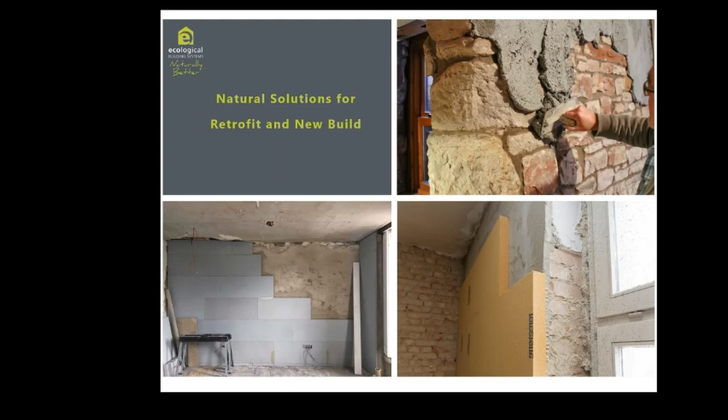What you can see is we've been supplying a range of solutions in ecological building systems for a long time. We've partnered with many of Europe's biggest manufacturers and suppliers of low energy products and low carbon solutions. For example, a lot that will feature today would be like Diathonite, thermal plasters, or Calsitherm that some people might be familiar with, to less familiar applications like natural paints and things like that.

For years and years we've been supplying these products to the market, but only more recently has there been a wider agreement that this is the type of thing that's needed. These types of solutions we've been supplying are now generally recognized as the right way to treat older buildings. So this document is hot off the press.

It's the latest government guidance for specifiers and installers, and it's now basically going to form part of the rulebook approach for improving energy efficiency in traditional buildings. It was published in 2024, or the last quarter of 2023.

One of the key points it raises, I took a quote directly from it: any measures that would present unacceptable hygrothermal risk should be excluded from the short list of measures. Now that's a warning to designers not to propose non-breathable applications in these types of buildings if they're likely to cause some form of decay or future detriment to the building.

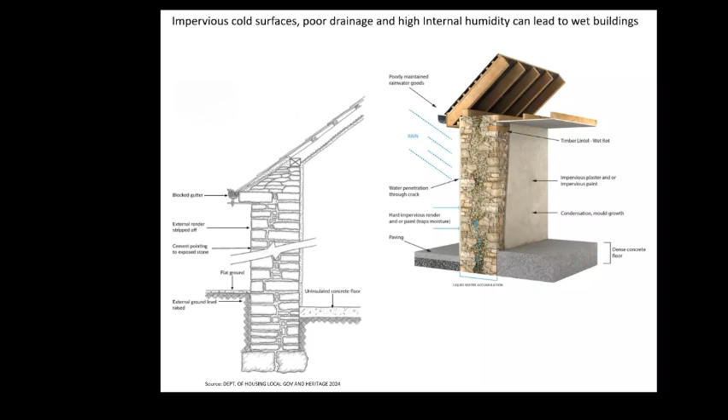It shouldn't just be 'put this up, it's grand, this is what we've done for years,' because what we've done for years has led to these types of problems.

What about the ground moisture? What about building decay and things that fall into disrepair over the years? There's a lot more factors at play than just internal moisture, so the dry line is a very highly risky approach.

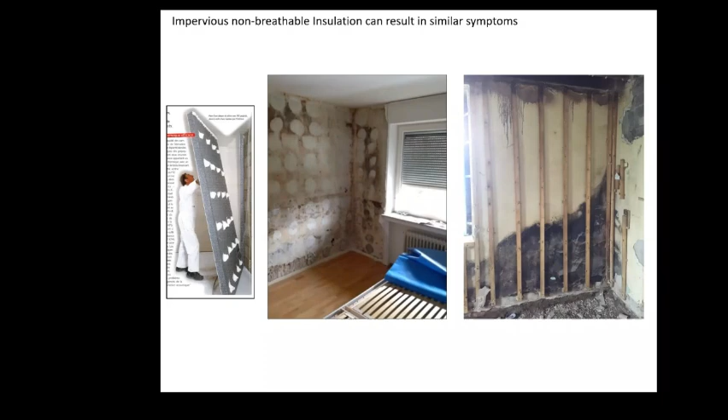And then you get this attitude whereby, oh, we can just keep it off the wall. If you keep it off the wall, you create a big space, like the spaces between the adhesive. A big unventilated space can be a stagnant air pocket full of moisture. As warm air leaks into that space, it gets more dense, and as it gets more dense, the humidity of the air rises until it falls out of the air, creating water pockets behind the insulation.

So the only way to do a system like that is to fully ventilate it to the outside, which would mean perforating an old building in multiple places, top and bottom, in rows and sequences of holes. So you can do a lot of damage to a building to ventilate a dry line like that. It's not appropriate, and probably not advisable to go down that road.

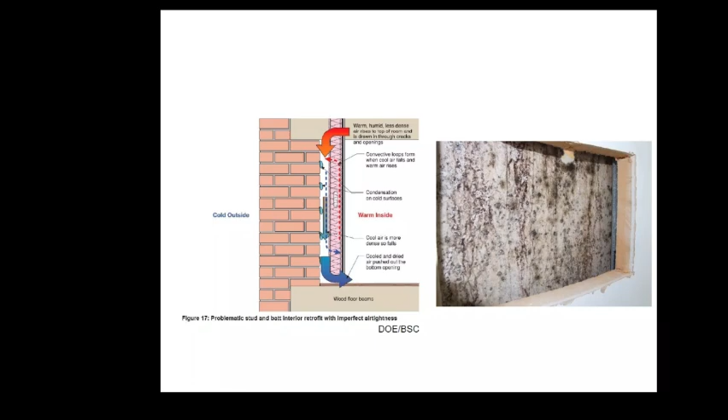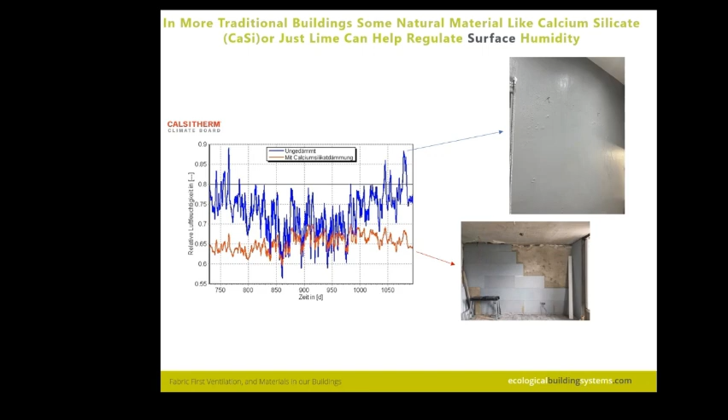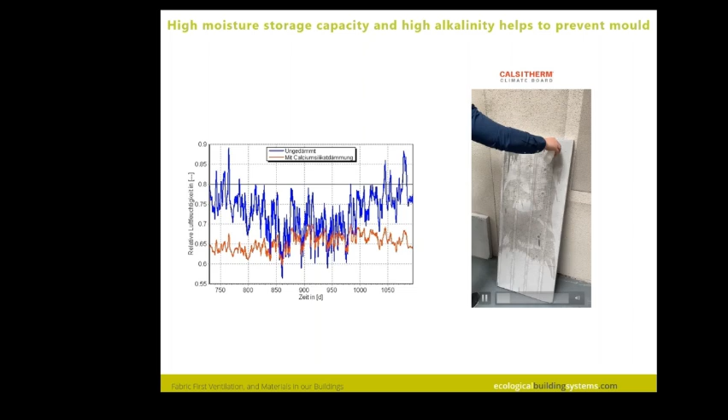Even if condensation was going to occur on a board like this, it wouldn't really matter, because lime, particularly lime or lime-based products, have a very good ability to prevent or buffer the influences of moisture over time. This image shows me actually pouring water onto a board that's made with lime.

You can see by how capillary active it is, how unlikely condensation is to occur on that board. The second a droplet of water tries to form, the lime-based product wicks that moisture into the storage capacity of the material, where it's held until vapor pressure dictates which direction it dries, usually back to the inside when temperature and ventilation is good. So boards like this can have a very high offsetting effect on the risks of condensation and mold.

In fact, they tried to make mold grow on this board in a lab in Germany for 90 days, and they couldn't get it to work, not even in a lab context, because lime also has a high alkalinity. High alkalinity is naturally antiseptic, so it's quite a good biocide. Lime-based products typically do this: lime paints, lime plasters, lime-based boards, things like that. This is why when people talk about old buildings and mention lime, most people think that sounds right for an old building—but these are the reasons why.

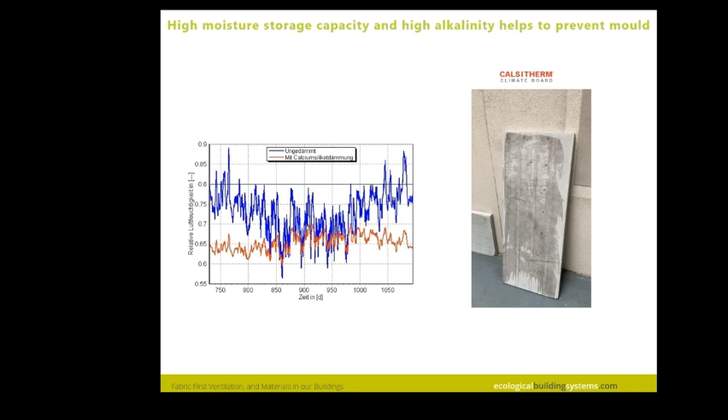That's often the reason why, back in the good old days, these solutions were very consistent with the behavior of traditional buildings and how they managed water in an ongoing fashion through the building life cycle. Back on the first image I showed you, a building covered in cement, the wall was clearly getting really wet. Well, this is why in the olden days they used to cover buildings in lime, with good drainage on the outside, well-maintained rainwater goods, good gravel floors, limecretes, and stuff like that.

Those walls were dealing with the same amount of water—the exact same amount hitting them daily, and the same wet lives where people were boiling pots, probably even wetter lives back then. But the walls were really capable of absorbing and desorbing moisture, managing it in an ongoing way. The moisture balance was right, and there was no water being trapped where it could accumulate—where, in essence, the cup could fill up.

In this case, the cup stayed empty. It was getting wet, but it was always drying. So this is what we're looking to achieve with insulation systems suitable for use in traditional buildings.

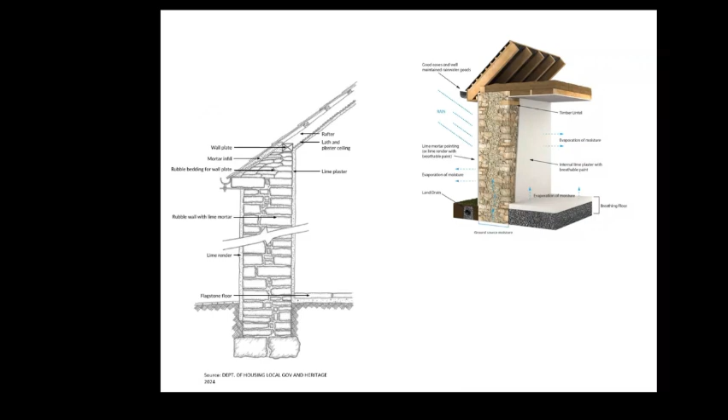So I've been monitoring with an air quality monitor, which I'll get onto later today, and the air quality was horrendous in the building. I've had all sorts of problems that have built up over years of mistreatment. So I finally bit the bullet and said, okay, I keep telling people about lime-based products—I'm going to do it myself, and actually look at the air quality and see how it's affected it.

So what I can say is it's been highly successful and no mold has returned. That's largely due to having warmer surface temperatures, but also a better ventilation system active within the building.

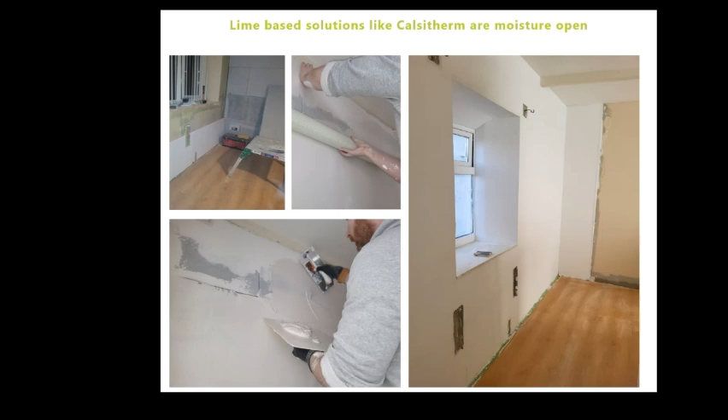Some lime-based solutions can come in other forms—they're not all board-based. Take this building, for example. How could you insulate this building with a board, either from the outside or the inside? But what you're looking at there is an insulated building, using a lime-based insulating plaster called Diathonite. Diathonite, which some of you may be familiar with, contains cork, clay, and diatomaceous earth, with equal parts hydrated and hydraulic lime.

Everything in it is completely natural, but it insulates about 25 times better than standard lime. And of course, it's CE marked, it has DOPs, it has EPDs available, and independent third-party certificate testing. So all these products comply with the European product regulations and Part D of the Irish building regulations. It's nothing like a fancy mix that you do on site that you can't actually quantify.

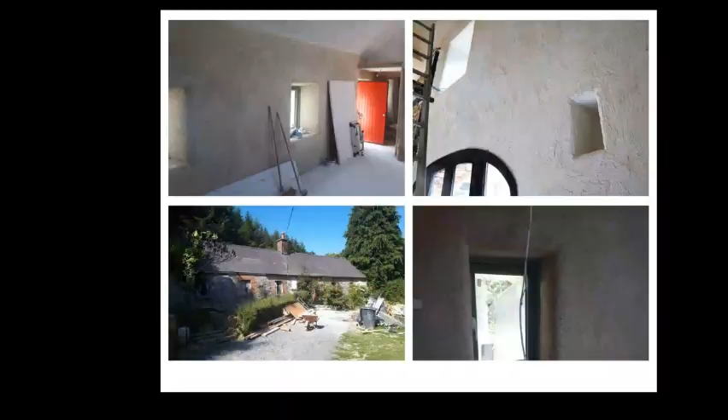It's something that's heavily tested and put through the ringer from a physics point of view. It can be used outside and it can be used inside. There is a range of finishes that can be applied to it. As you can see here, a good plasterer wanted a Mediterranean look on the plaster finish. I don't particularly like it, but they loved it in the building. Apparently this is quite popular in some parts of the world, but it can be done in a very traditional way with rounded reveals and stuff like that, or it can be done in a very contemporary way.

This building is done both on the outside and the inside with that same product, and it's a protected structure. So very little in terms of the material palette is suitable or appropriate for a building like this. Imagine trying to explain to the homeowner that they should put XPS boards up against this building, or a dry lining system internally. You'd lose every feature in the building.

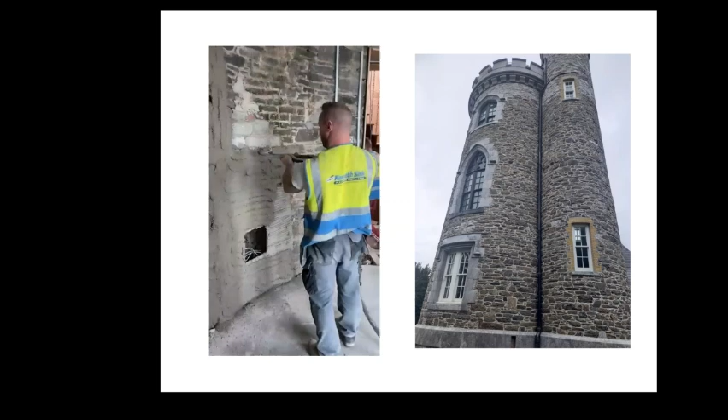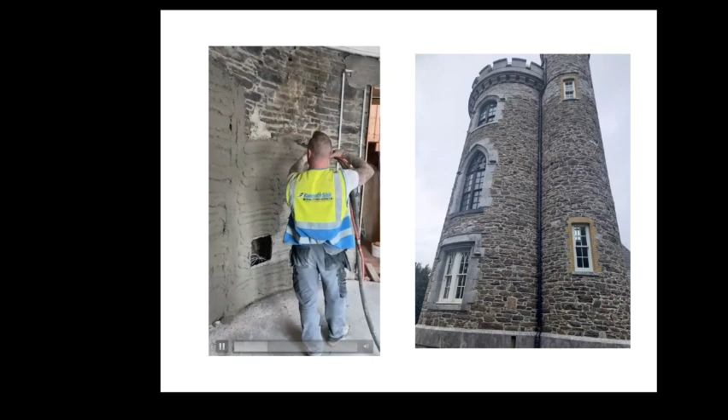You can't put a dry line in here, and you obviously can't insulate the building from the outside. So this is Ken Sisk plastering, applying the product using a plaster pump that will be applied very quickly in multiple layers, day after day. All he's putting on the wall is lime, cork, clay, and diatomaceous earth, applied in multiple layers until the desired thickness is achieved.

Basically what they do is work between reference bands, which you can see positioned on the wall, so he can get a consistent depth everywhere. He'll work between those and screed off between them, and he'll reduce his depths going into reveals.

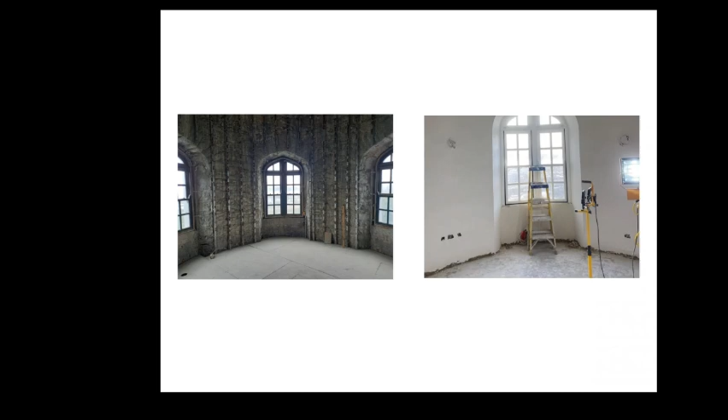Once it's all cured and screeded off, they'll put a nice fine white lime finish on it, like you can see in the right-hand image. This is a pretty standard approach to an insulating plaster project like that, and it can be scaled up to massive projects like this, where really other options just aren't there. You couldn't alter the character of a building like this by putting in rectangular boards.

The second thing I noticed in that building when I walk into it is the acoustics are like no church I've ever been in. It's got quite a good noise reduction coefficient. That wasn't something that was planned in this case, but it's something that's quite noticeable - it's a very soft sound in that church. If anyone's ever down there, go on in and take a look.

So that's just to give you an idea. This was it while it was going on, and you can still create edges using arch beads and things like that. But ultimately, when it's finished and painted with a nice breathable paint, you end up with a church that looks like a church, but it's been very well insulated, contrary to other ways of doing things.

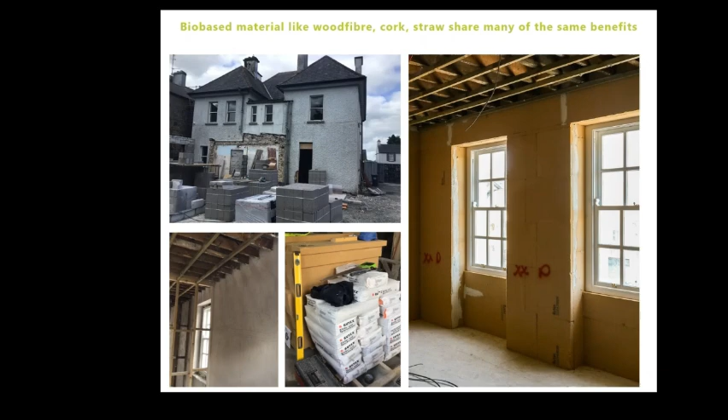So that's a lime-based system, but a lot of bio-based materials like wood fiber, cork, or straw share many of the same benefits as the lime-based systems, and actually most of them are recommended to be applied onto lime or finished with lime.

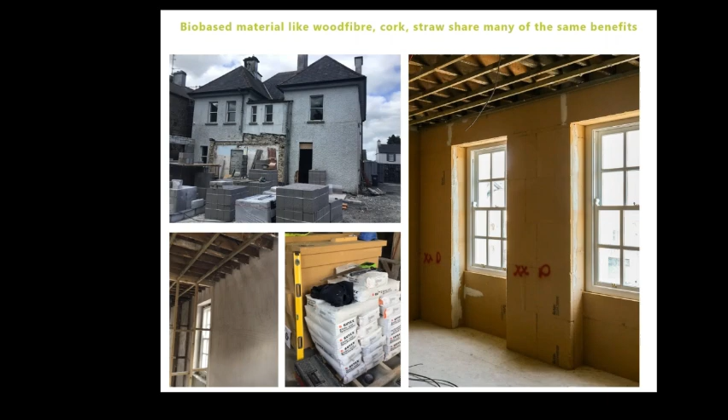In this case, I'm showing a product called Gutex Thermo Room, which is a wood fiber insulating board, but it's bonded onto a lime background, which has to be straight and level. You can see in the bottom left-hand image how they prepared the wall with lime. Then the wood fiber is bonded onto the wall, and then it's finished with a lime finish on top of it. So it traps the biogenic board between two lime surfaces, giving you all the breathable advantages of both products, completely compatible and consistent with most current guidance.

And the reason they want to do that is they're currently analyzing both sides with in-situ moisture and thermal monitors. So they're going to try and publish documents that will lead to better guidance for specifiers looking after buildings in state care and things like that. So it's important.

I should point out that in-situ monitoring of U values is being promoted heavily in protected structures and buildings of interest, but where undertaken, it should be done in accordance with ISO 9869. In the absence of acceptance of that standard by the European Commission at the moment, in-situ U values are currently not an acceptable source of data for demonstrating compliance with TGD Part L in BER calculations, which I think is very frustrating.

But until they get some sort of agreement on 9869, that's the way it is. But it's still being recognised and still being promoted as a more accurate way to reflect the U value of old walls, particularly where Part L requirements don't apply, but buildings that are exempt, like protected structures.

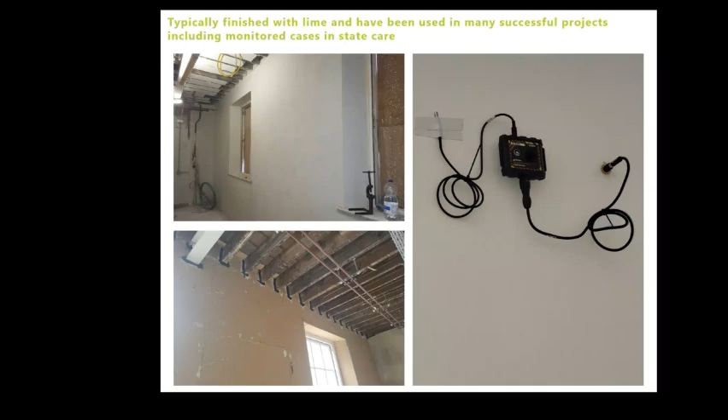So wood fiber is really useful insulation, and people kind of have a mindset thinking that it's often used like in modern new build construction or timber frame construction, and that's true. But sometimes this can form part of a retrofit.

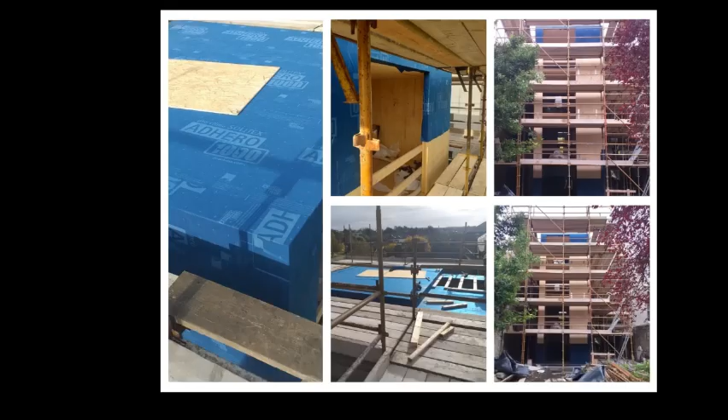So while it is true that you're seeing wood fiber more and more in modular construction, like this project, which is a modern method of construction by Activo, where they're applying it as a secondary insulation to the outside of modular units, you are seeing in some cases where modern methods of construction are being used in combination with older buildings.

What I'm looking at here is a low carbon construction technique called CLT, cross-laminated timber, being used as an extension off the back of a mid-terrace Edwardian building in Dublin, a 4-story Edwardian building. So it's actually a modern method of construction being bolted onto the back of an old brick building.

And in that case, this building has similar requirements to older buildings. Timber needs to breathe, it shouldn't be getting wet, etc. So we do supply membranes which can form the airtight layer. They're helped to protect the product during the wetting phase or the construction phase.

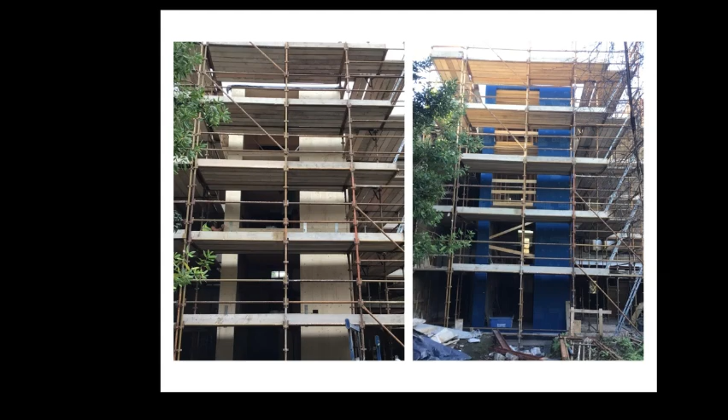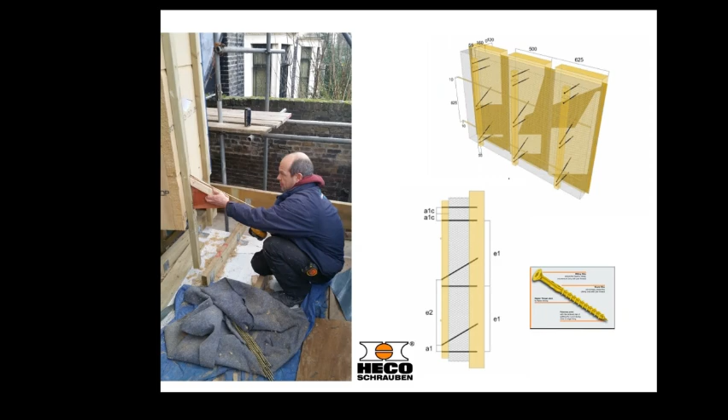But as a company, we also supply the calculations and the recommendations required for the engineered fixings that are necessary to mechanically fasten the wood fibers into position. And as I said, that's quite important that as a supplier, we're not just selling products. It's important to note that we offer these technical services as well, because it's important that they're installed well, because that's why products get a bad name.

Products don't fail people, people fail material. That might generally be a bit cheesy, but it's also very true. So we have quite a detailed technical backup as a company, and people that we work with on projects would generally lean on us quite a bit.

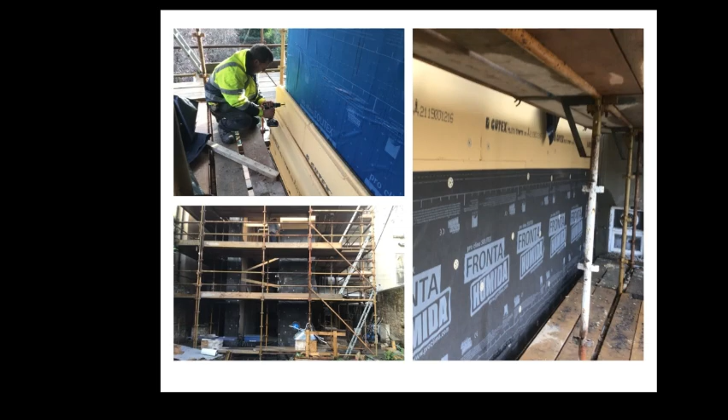But wood fiber's versatility is well known, but sometimes what you might notice, particularly if you're surveying a building or something like that, is you mightn't often see the opportunities to insulate an older building. But here's a prime example of that.

Here's the Rubrics building roof. It's the oldest building on Trinity campus. And since the 17th century, this building has had no insulation on its roof. So therefore, when the heating is turned on inside, I guess if you had a big enough thermal imaging camera and you were upstairs looking down at it, you would see a lot of heat loss through the roof.

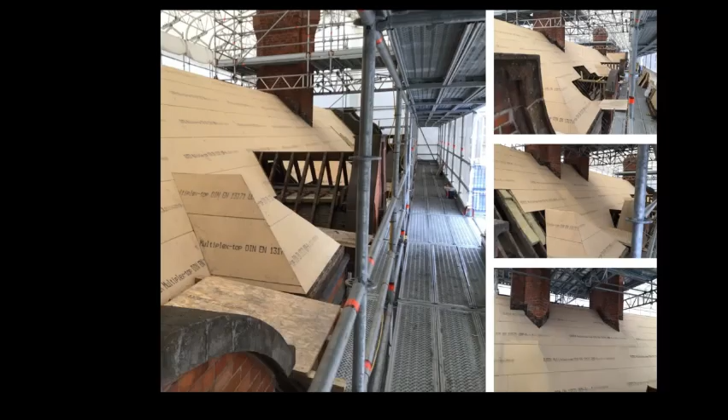But wood fiber, being compatible with timber from a conservation point of view, there's nothing more like-for-like than timber with timber. So it's a prime opportunity for old roofs to insulate them from above. Throw a blanket of insulation up over the roof, insulate into your rafters and create an airtight line inside. That's how you thermally refurbish an old roof, and do it in a protection-type way.

That actual product is also very weather durable and it offers another layer of protection under old slates and things like that in the event of a roof leak over time. So it'll help keep the building warm, yes, but it'll also help keep the building dry long into the future.

And it's essential that we bring these buildings into modern standards. Otherwise, they're going to be too difficult to heat. Likewise, a building like that, using natural materials opens more opportunities to insulate them in general.

So that building is actually quite well insulated. Believe it or not, you don't really notice it because it just looks historically accurate. And the only reason the upper floors are not insulated with the same thermoplaster is historically they never had plaster on it, so from a conservation permission point of view, it wasn't acceptable.

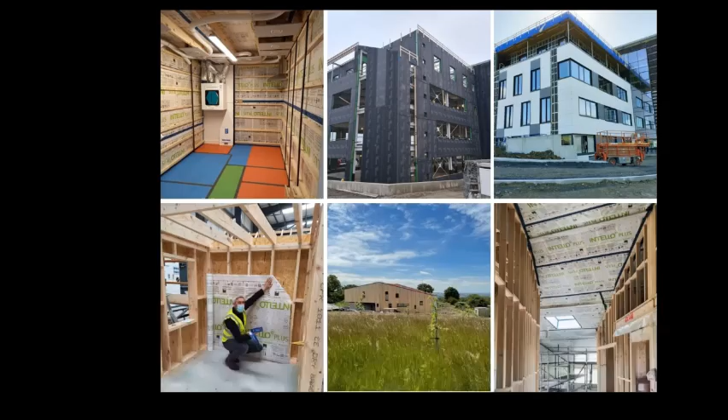But this building also used clever airtight and wind-tight taping in the reveals. You can't see it because it was pinched nicely between the plaster and the frames. Draft proofing in this building was a key focus because from a retrofit point of view, airtightness is not just for new builds. While it is recognised that airtightness is probably very useful in new builds, it's often seen as maybe one of the key indicators of a high-quality passive house.

For example, LOETB have training centres, the National Construction Centre, where they show people how to do airtight detailing to the highest possible standard. You'll see this type of airtight detailing taking place across the most airtight passive houses in the country, and even the NZEB Centre of Excellence in Wexford and stuff like that.

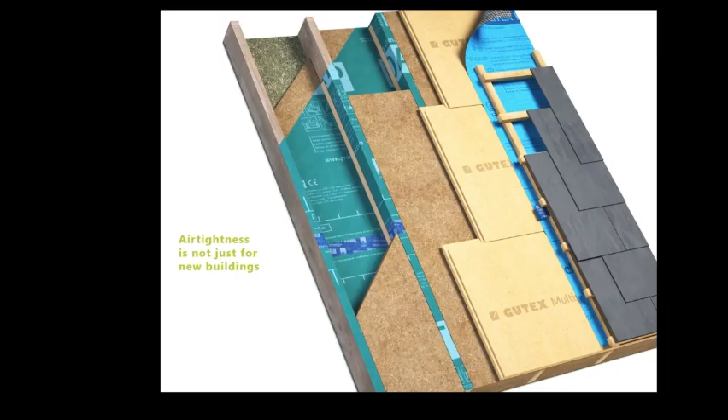But in reality, airtightness is not just for new builds. Airtightness is also for older buildings, okay? And what's often overlooked—and this is actually coming from that energy efficiency in traditional buildings guidance booklet that's been published—is the necessity for airtightness to prevent the movement of moist air through convection, which is basically air moving through the building fabric or at junctions between elements, and that can lead to condensation risk.

So in this image, what you're looking at, that green membrane that's kind of over and between the rafters, that's a retrofit membrane. In the bottom position, underneath the insulation, it's more vapor tight because it's in a warmer area. But in the top position where it crosses over the top of a rafter, it's more vapor open, so that if any vapor does get in there, it can escape through it. These are retrofit membranes that can be used to kind of cradle insulation between the rafters when being insulated from above.

But contrary to popular belief, leaky construction is not a feature of traditional buildings—this is debunking that myth. It's a consequence of the longevity of the building. Basically, buildings get more leaky due to shrinkage and settlement, repairs, wetting and drying over the years, over the lifetime of a building. But that's all led to unintended cracks and airflow pathways that people would have thought were design intentions. They were never intended to be leaky buildings.

In fact, there's a lot of data out there that shows buildings built in the 19th century are as airtight as buildings built in the mid-90s and the mid-2000s. There's a lot of data to show that they just got more leaky over time. So traditional construction can really achieve high levels of airtightness without danger to the building fabric.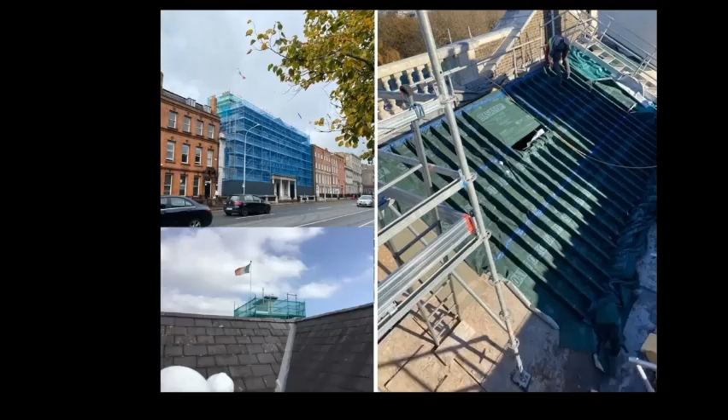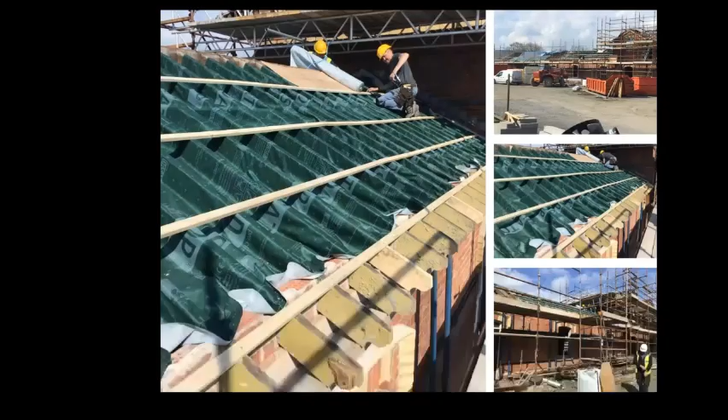And just to prove it, here's Iveagh House, the Department of Foreign Affairs, where they took a similar strategy, retrofitting the roof, putting in an airtight vapor control layer before insulation was placed in. Here's a protected structure railway house by Cooney Architects, McKelvey Construction in Ballinamore, where a similar approach was taken. And you'll notice it's quite simple and quite straightforward.

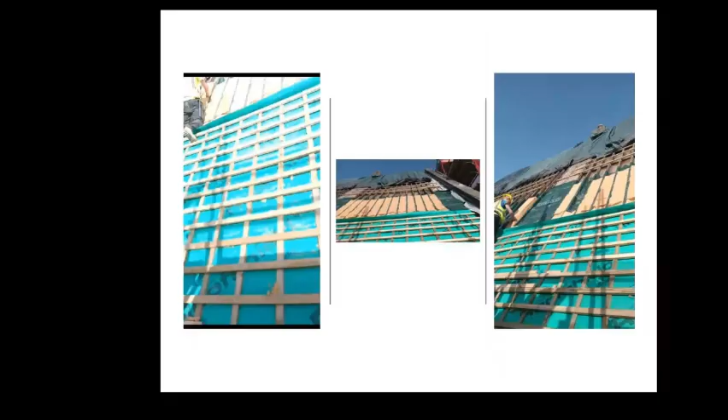Here's Shankill Church in Lurgan. I think I have a small video just to give you an idea of the scale. Again, just like people would have thought, you can't insulate these roofs, but you can.

As you can see, it's quite a massive scale, but you can see them fitting a flexible wood fibre insulation, tightly packed between the old timber rafters without disturbing the existing lath and lime ceilings below, because the membrane is in position, cradling the insulation and preventing any forces on the existing ceilings.

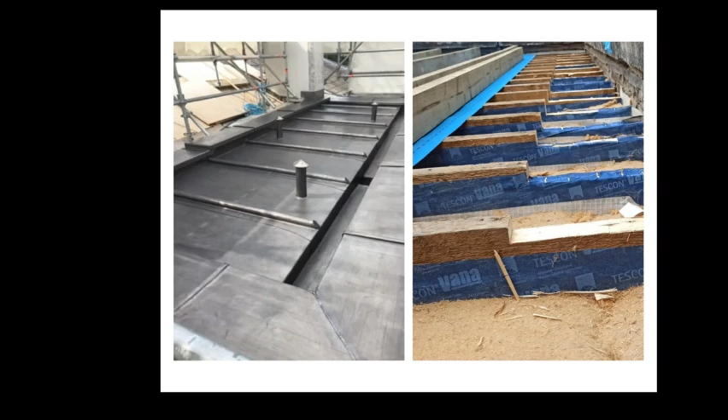And here, without naming the man, it's quite an important politician that most people would love, and this was his house in the centre of Dublin, and this is his roof. As you can see, he's also taken the opportunity to retrofit little bits of airtight membrane between existing ceiling joists on a flat roof detail before applying a flexible wood fibre between the ceiling joists and leaving a ventilation space to create a traditional cold roof.

So they took the opportunity because the building was so old, so big and so leaky that while they have a chance to restore part of the roof, they're going to take it. And there's a really, really good roofer here called Jamie O'Driscoll that carried out the work to an extraordinary standard.

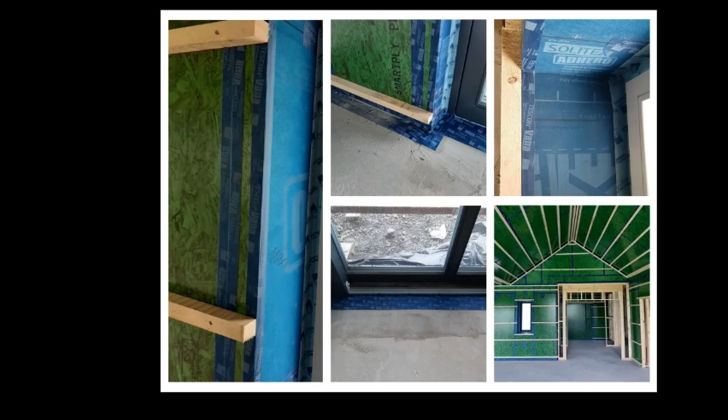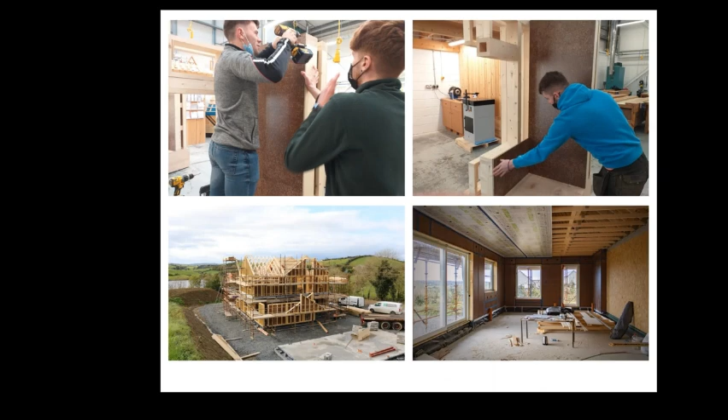But again, it's only to go back to this: while high quality airtight detailing like this timber frame by Shoalwater is often the indicator that it's going to be a good airtight building, in fact airtightness is not just for new builds, and the skills are out there to do it. There's a lot of training available in Ireland for people to do airtightness, but airtightness is really easy. The skills are not lacking in this area, and general awareness around the vital role that airtightness plays in all construction has grown, even in traditional buildings.

They make the point about airtightness because it's really key to think: if the building is going to be more airtight, more energy efficient as a result, you really do need to be a little bit aware of the critical role that air movement is going to play in the building.

Controlling humidity at source lets us build more capacity into our overall insulation strategy. Most fabric retrofit measures reduce natural ventilation, and that leads to poor indoor air quality and increased moisture buildup. The more you do in a building, the more likely it is that this is going to occur.

Ventilation is defined as the purposeful supply of fresh outside air and the removal of stale indoor air to or from conditioned spaces within a building. The ventilation might be provided by natural or mechanical means, and it's characterized by controlled exchange of air as opposed to uncontrolled leakage. In this building here, you can see in this image the issue is that they have what they think is a naturally ventilated wall.

So they have a hole in the wall, but they've got terrible problems with indoor air quality because it's evident by the mould growing on the ceiling. That mould is only growing because the internal conditions are bad enough that the conditions needed for mould can thrive. This is being caused by unplanned air leakage or a lack of air change in the building.

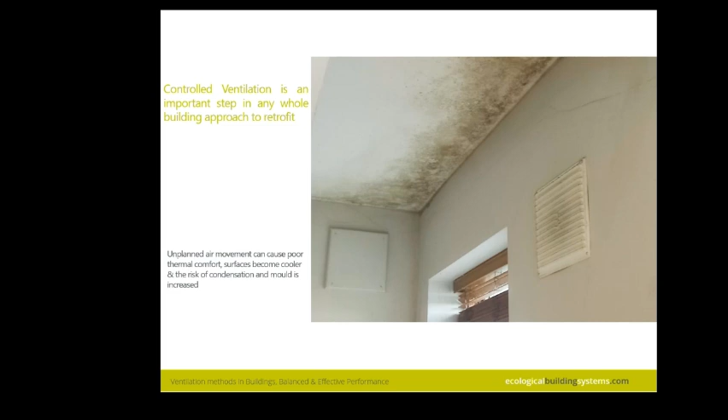As a company, we supply a decentralized system that can be useful in a retrofit context. I'm not going to get into it too much today, it's for another day, but whole building decentralized ventilation can cross-ventilate entire spaces if they're planned correctly.

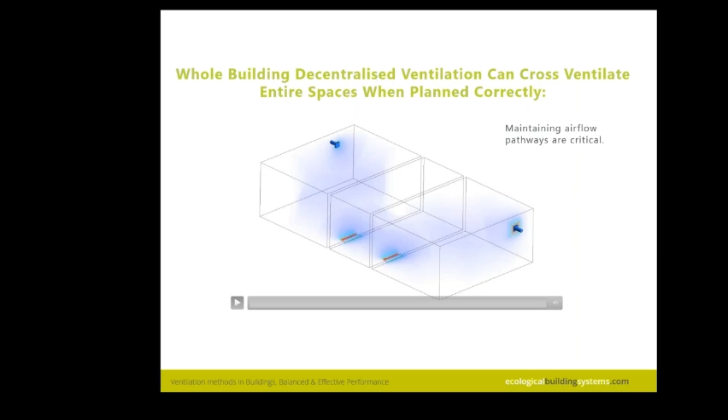Just to give you a little idea, here's a fluid dynamics program that demonstrates how they work. They work in push-pull fashion, where one fan is pushing air into a building while the other fan is pulling air out. The one that's pulling air out is pulling out warm, stale air, so it's important that that warm, stale air is passing through a heat exchanger.

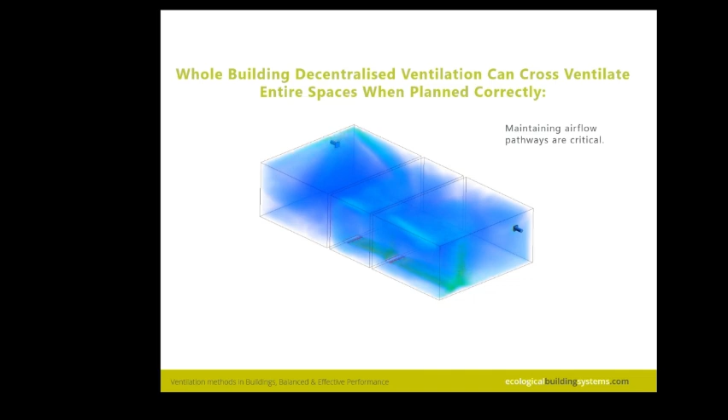After 70 seconds, you'll notice under the doors where the door cuts are, the airflow direction changes. Now the air that was being pulled out, the warm air from the left-hand side, that fan is now pulling in cool air across the pre-warmed heat exchanger, delivering heat recovery to the building while also mixing the air or diluting the potentially stale air within the building. This is a very simple plan, but just to give you an idea of how push-pull systems actually work, they're always planned in pairs.

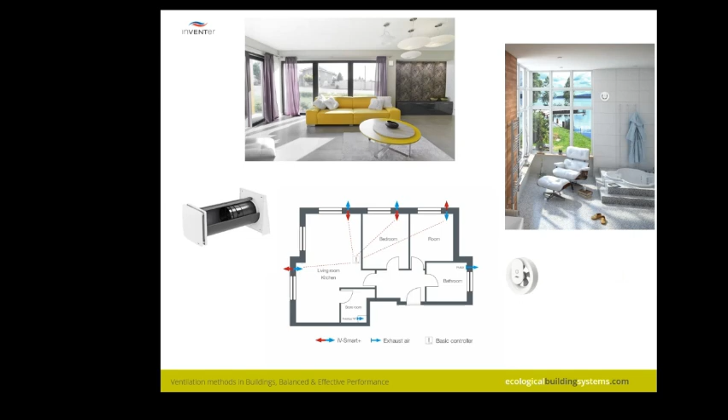To give you an idea of what the main fan looks like, you can see one on the left-hand side. That's a decentralized heat recovery fan. If used in isolation on its own, it could technically be called a single room heat recovery ventilator. But when used in a pair, it's more accurate to describe this as a push-pull system where things between get cross-ventilated. In bathrooms, you just use classic extract, demand-controlled, humidity sensitive, light sensitive, odor sensitive, things like that.

If you plan it correctly in pairs, there's nothing to stop you doing it for more complex spaces, because it's really still just a matter of positioning fans in the right place so that everything in between gets air and air change. So air quality in buildings is hugely important.

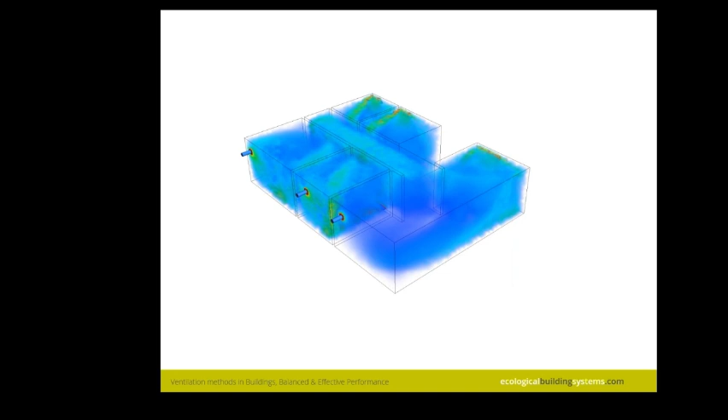I mentioned my own project at the start, and how I've been looking at air quality in my own project, because I have evidence of poor air quality everywhere - mold, condensation, etc. So I've been monitoring it myself with little handy air quality monitors, collecting data, and I want to know what the level of harmful pollutants are within my environment.

Indoor air can be 5 times more polluted than outdoor air, and it's between 200 and 500 times more likely to carry carcinogens like radon. That's huge. Your internal environment can have a real bad effect on your health or a good effect on your health. You want to be surrounded by fresh air in the same way as you want to drink fresh water. You wouldn't drink dirty water, but we've been breathing dirty air for years.

There are numbers of commercial monitors on the market, but they usually all look at the same things - temperature, humidity. Some of them look at particulate matter, carbon dioxide, ozone, nitrous, etc. Radon is another one, but it's recommended that if you want to do something quite scientific, you need to look at post-retrofit, pre-retrofit air quality as a way of measuring your success or failure.

So what I've done is I've taken a look at pre-retrofit air quality - shocking bad - and then I've taken a look at the measures I've put in and how they've influenced the space. In my case, I want to look at two things as a useful indication of air quality: humidity and carbon in my air, because carbon and humidity are generally generated by people's activities inside. So the more people you have in a space, the higher those metrics will be, and the better ventilated your space, the more controlled it will be.

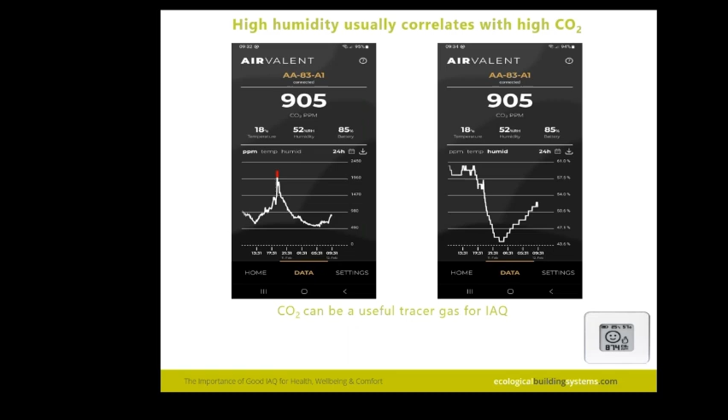Just to come back to the installations again, you can play around with these materials and sometimes they might be useful in ways you're not expecting. Here's a job in Kilrush, a really interesting building that belonged to the Vandeleur family back in the 1830s. This building has been handed down for the last 2 centuries through a medical family - I think they used to sell drugs, but not like drug dealers.

Michael Keating was the architect on this one, but they had a lot of challenges. They wanted this little projecting staircase off the back of the building, and they wanted to keep the inside of that exposed stone, but they were insulating all of the building from the inside with Calcitherm. So the problem was that to keep that exposed stone inside, they'd have to accept a big thermal bridge in that area and a lot of heat loss.

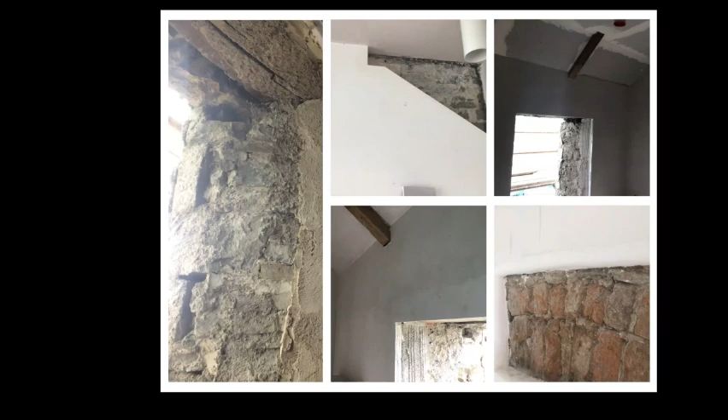So Diatonite, in combination with Calcitherm being used inside, was used to insulate the projecting part of the building—you can see it on the right-hand side where it's getting some color samples put on it. They insulated around the outside of that without changing the aspect of the building at all, then continued with Calcitherm, the calcium silicate lime board, on the inside of the rest of the building. They accepted loads of compromises and thermal bridges because they wanted to expose the stone in that area. These products are quite versatile and help offset the risk of condensation and mold.

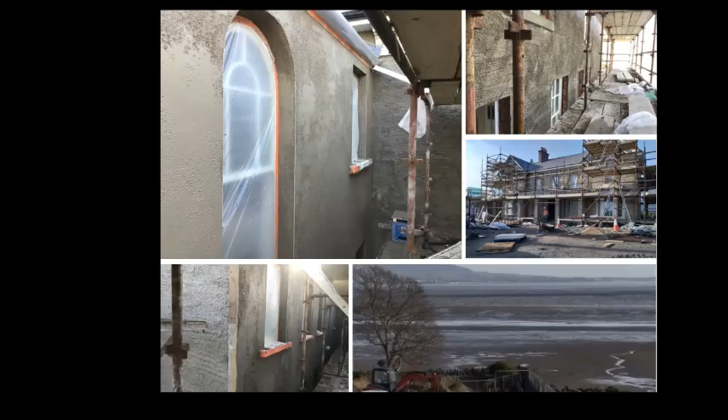The Diatonite comes in many forms. Some forms can be used in very saline environments—coastal projects where people are concerned about using plasters because of the high salt content. But there are products in the range suitable even for these really severe situations, like this case, where when the man looks out his door, he's practically in the sea when the tide is in. Here, Diatonite was used, and it's holding up really well.

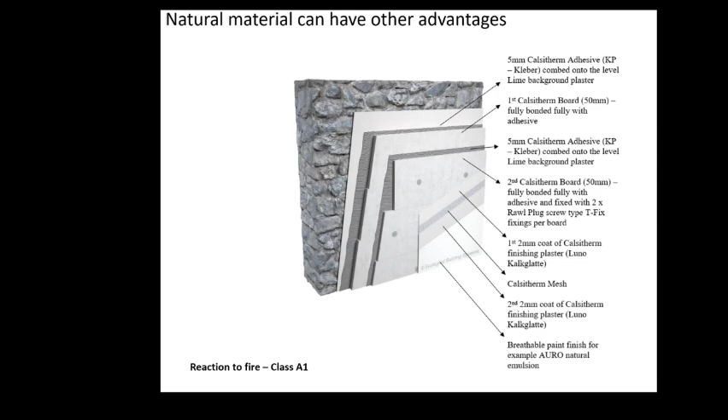Natural materials can have lots of advantages, for example their reaction to fire—Class A1 non-combustible—and that's why it was used very successfully in the Primark building. You can see Calsitherm was applied in the restoration and upgrade of that building, and they multi-layered it because building regulations called for quite an onerous U-value. The architect was Hall Black Douglas and JCA on that job, and it was really, really successful.

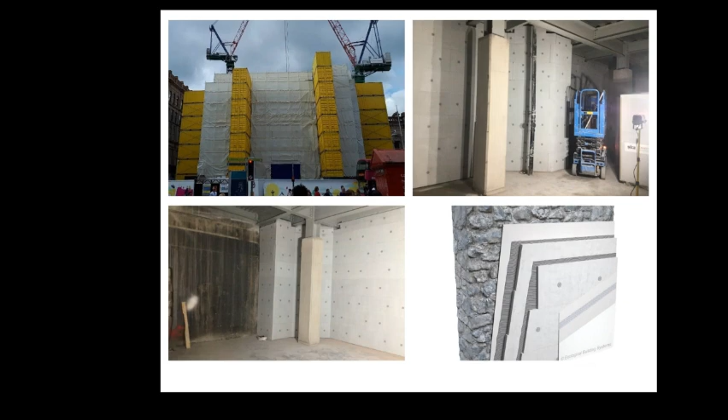If anyone's ever in the building, the only place you'll actually see Calsitherm—because of all the shop fit-out—is up near the clock on the very top floor. What you're looking at surrounding that clock is actually Calsitherm. So it's the only place in the entire building where it's visible, but the entire building was done with calcium silicate. Natural installations can sometimes be a bit of a surprise.

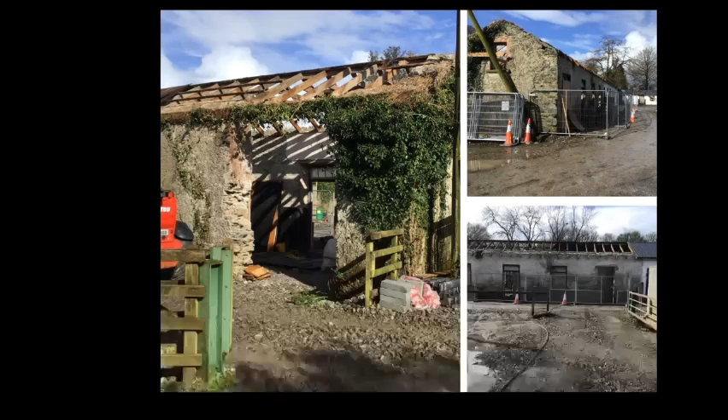So I'm going to wrap up with a stable conversion project in Killarney, County Kerry, by an architect called Sean McGillicuddy, with Ned O'Shea Builders and Sons carrying out the project. What I like about this project is they took it from this state to an A2. They brought an old stable that you'd really need to look at from the start to notice what you could do with it.

The architect had a desire to do this in a low carbon way, and he had a client equally optimistic about the same goal. They wanted to bring it to modern living standards, but as ecologically as possible, while still having a nice, comfortable space to live in at the end. It was a former stable that housed prize-winning horses in Kerry, and it was really structurally unsound, with no perimeter drainage and a lot of decay over the years.

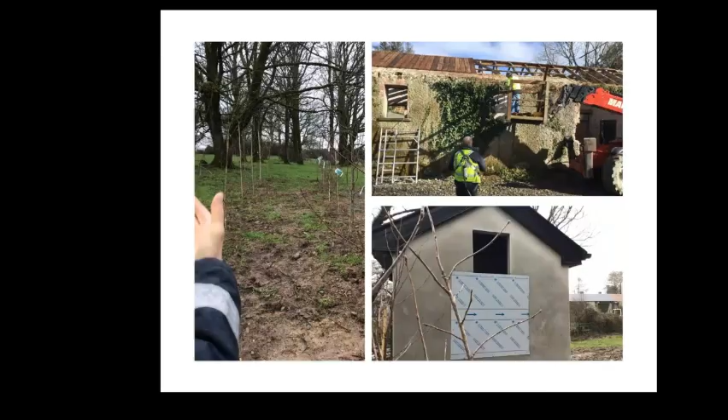To make matters worse, they found bats on the site, so they had to halt the project for a while and get Batman in with his little silk bags, picking them out of the ivy while they were all asleep. I just happened to be there visiting with the architect when this was occurring, so I got to chill out and look at what they were doing for a while. They were taking the little bats out from behind the ivy, and there was about 20 of them.

They had to create a little bat cave for them, shown in the bottom right image, which they built on site, along with a slippy panel so that if anything like a ferret tried to climb on it, it would just slip off before reaching the entrance. They rehoused the bats inside, then planted willow trees in two lines toward their habitat, since bats feed in that kind of cluster of trees, to try and direct them into their new house and hope they'd accept it. Apparently it was very successful, and it let them get on with the job.

So they did it the right way, and got off to a better start. They didn't want to change the dimensions of the building too much, and really they couldn't, so they used the existing floor plan, with a small rear extension on the ground floor. That extension was actually made from block, but they put a roof with Gutex insulation on top, and insulated into the roof with natural fiber insulation, making it airtight from the inside. The rest of the building stayed the same — just the old barn — but they cut a big hole through the south-facing aspect to make the most of the view there.

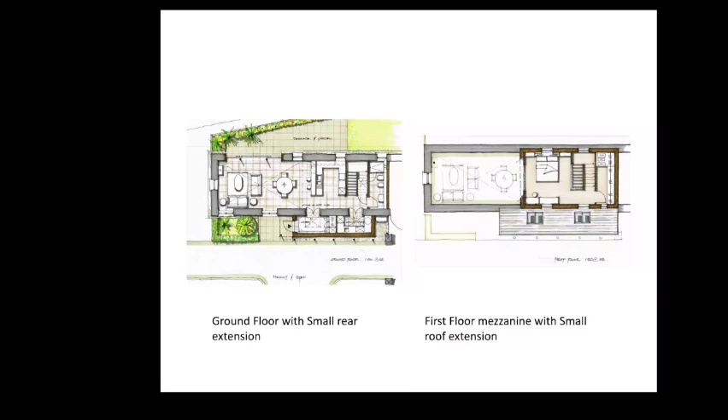You see the kind of big sliding door that they have in the kitchen diner. To make some more space to sleep in, they built a timber frame construction onto the top, so you see the first floor mezzanine with the small roof extension.

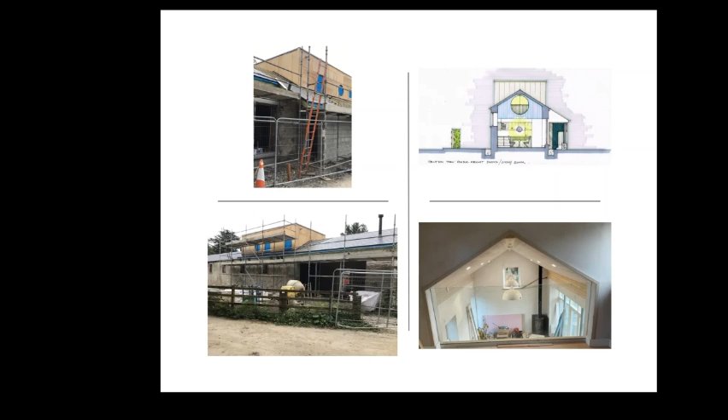They built that onto the top of the old barn, and that's what it looked like from above. It's a timber frame, low carbon extension moving upward, but still keeping the same type of dimensions within the building. That was done with natural fiber insulation, wood fibers on the outside, wood fibers across the roof, airtight membranes, and finished inside with wood fiber finished with lime, which is what you're looking at in the bottom right hand image. This is an idea of how they built those timber frame walls and how they insulated the old stone walls from the inside.

In the top right image, you can see they put a background layer of insulating plaster against the old stone wall, followed by a 60mm wood fiber board coated with a lime finish and breathable paint. On the roof, they put wood fiber board over the rafter, wood fiber board in the rafter, and airtight membranes underneath the rafter to seal the building airtightly.

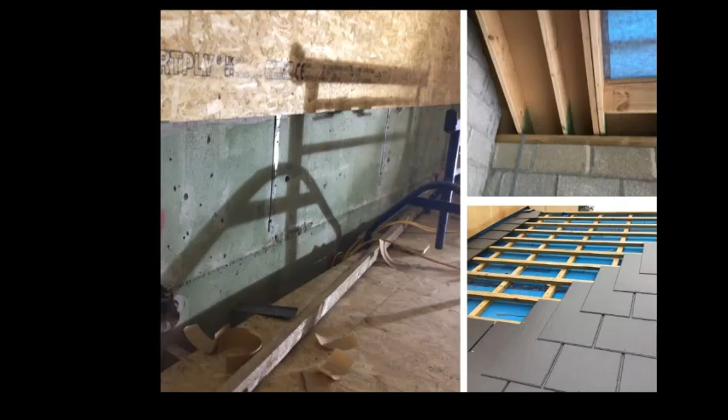There were some challenges, of course, which I'm not going to get into too much, but some of the structural repairs required concrete. What you're seeing here is the green colouring on the concrete, which was a grip primer applied to allow the thermal plaster to continue from old stone walls into concrete areas, as a continuation of the insulation strategy.

You're looking at some clever detailing there on the roof. Counterbattens were applied to give a large amount of ventilation underneath the slate, to make sure that any vapor that does get in there is dealt with by the wind accordingly.

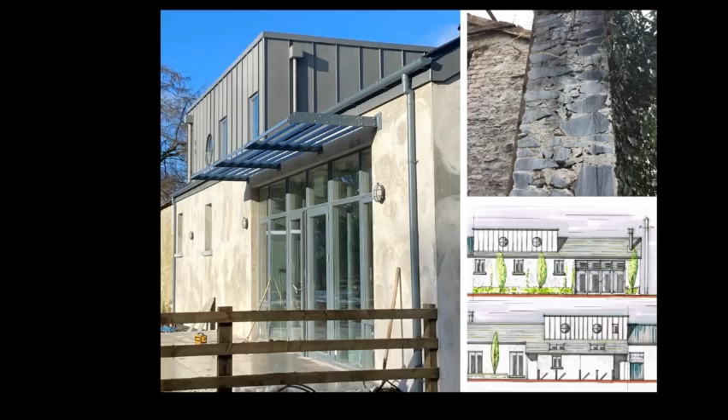What you're looking at in the top right hand image is how they cut through the old stone wall with a rail saw to make use of that view, which is fantastic. Where it's actually pointing is one of probably the best views in Ireland.

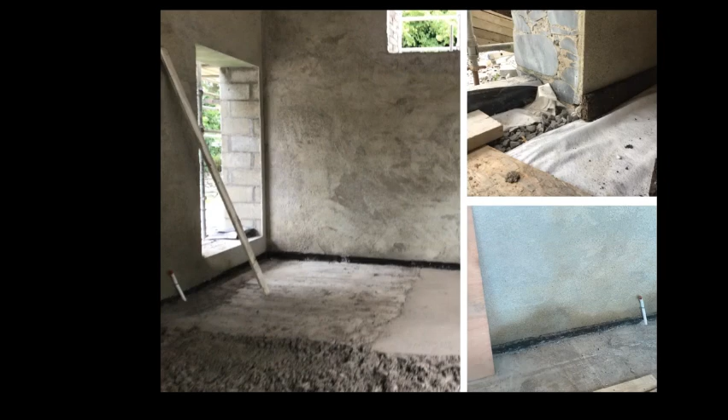They insulated their floor with limecrete screed on top of foam glass gravel. You can see a little bit of the suggestion of foam glass gravel in the top right image underneath the geotextile membrane, and then the geotextile membrane had lime applied onto it. There's a little perimeter of cork board applied against the thermal plaster in preparation for the wood fiber, which will be applied later to the wall.

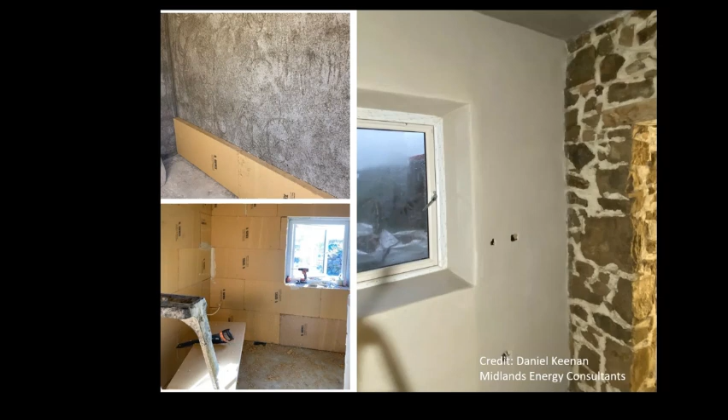Now, I wasn't there when the wood fiber was being applied, but a good friend of mine who might actually be in attendance today, Daniel Keenan, would be a colleague of you guys. Daniel would be very versatile in this area, and very fluent in the use of case studies, low impact materials and older buildings. But he practices what he preaches too. He actually bought an old cottage and did it up himself.

I've used these images and inserted them into that other case study, because it's exactly what they did in that case study. Daniel leveled his walls with thermal plaster, which you can see in the top left image, before applying wood fiber boards and doing some nice airtight detailing at that stage onto the thermal plaster, before finishing everything with nice lime in a very traditional way. So you can see that it's very practical and very easy to achieve, but also very highly appropriate in the right context, whether it's in Kerry or in County Longford.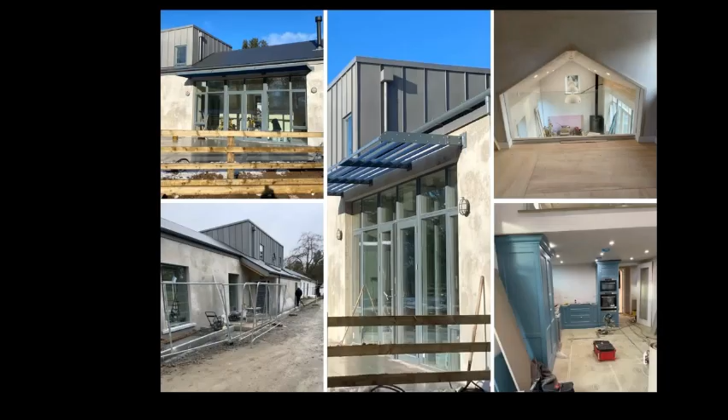When the project was finished, the client in this case might be quite a litigious person, involved in law at a very, very high level. They're reporting that they're living in a really, really nice house. But the most important thing was just with a heat pump, the right windows, and the right moderate levels of insulation in the right places, they got an A2. That's quite a considerable upgrade for a building like that. It's probably my favorite retrofit at the moment that I've worked on, because it just shows that it is absolutely appropriate to tackle a building in this way.